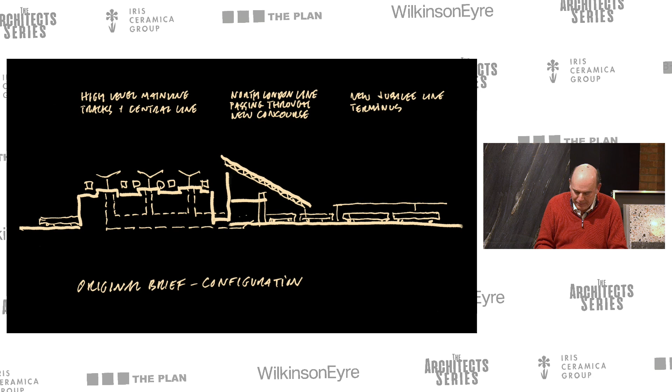This slide is interesting because this was the brief we were given: the high-level railways, and some sort of station with a roof leaning towards the railways, and don't worry about the town off to one side. We didn't spend long thinking that was a solution, and very quickly came up with the idea of turning it round to face south, so people could see this building and let the sun stream in. That idea generated this form, almost part of an elliptical shape with a simple roof and a very lightweight southern elevation with lots of glass.

The idea was to get the light to stream in. Somebody actually said to me they felt like they'd arrived at the seaside when they came off another train underneath the other railways and appeared in this space. So the sense of arrival was an important thing.

I think we'd definitely learnt something about the intricacies of curving geometries from the work on the depot. Here, this form was also generated by an idea about ventilation, that the air would come in at low level and the whole of the roof acts like a solar chimney, drawing air across itself so that you get a nice gentle breeze in the space.

And then the idea of contrasting the super lightness of this deep truss with the cables, and then an almost seamless roof behind, which acts almost like a giant luminaire. We're bouncing the lights off low level onto the roof and down onto the concourse below.

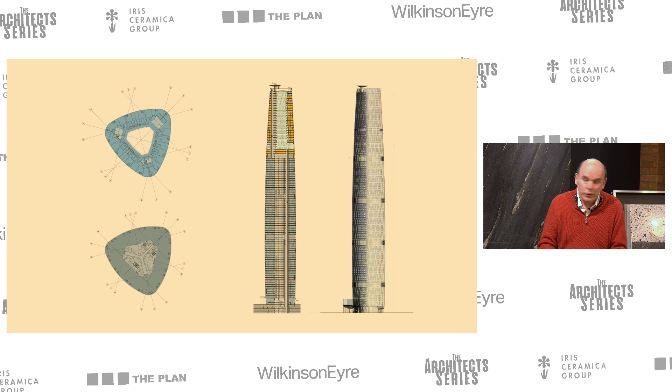And there it is. It's about two-thirds office, and then one-third on the top is the hotel, with the extraordinary space up the middle, the atrium space.

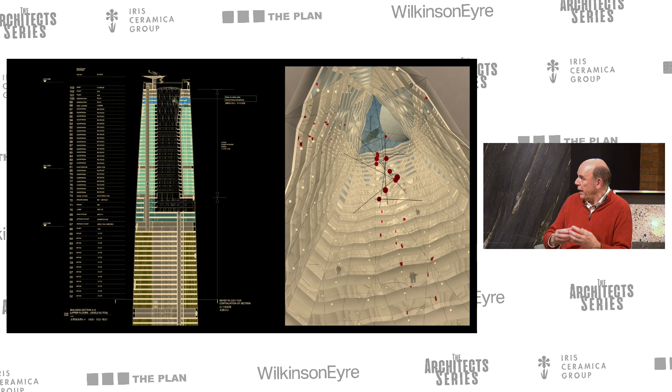Somehow we wanted to reflect the diagrid that was on the outside on the inside, and was struggling to think of a way of doing it. Then this idea came of expressing it as a series of diamond shapes and just pushing them out, so it got this sort of crinkling effect as you work round.

And it does create this extraordinary space. You can hardly see, actually you can just about see at the top, there's a little staircase that cantilevers out over the space - not for the faint-hearted, because it's an awfully long way down.

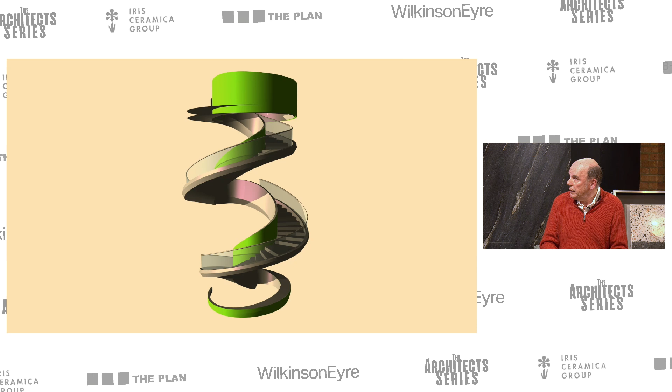Now, another project on this theme of geometry is the Wellcome Collection on Euston Road. The key thing on this project was the staircase. They had a problem that they couldn't get people to go up through the building to see the other exhibits, a library, and all the other things in there. So they were just concentrating on one floor, going to the cafe and the bookshop, and not really getting any further in.

We had this idea of a staircase which would link up these various spaces, along with some other alterations. It's made out of steel. Actually this is a slightly freer form - not purely geometric or rationalized geometry - and we're rather enjoying the artiness, in a sense, of a freer form as it works its way up.

It was an extremely complicated thing to build, but the Wellcome Trust was fully behind it, even though it took a little bit longer than we thought it would take.

And then we've done many, many bridges, but this is the most recent one in Copenhagen, called Lille Langebro. Copenhagen is a cycling city, as I'm sure you know. But it just happened that they had this new project, which you can see here on the screen on the left, called BLOX, an OMA arts centre. And they wanted to have something that connected Christianshavn with the main part of the city over the harbour, hence the competition for this bridge.

Now, we felt, looking at it, that in Copenhagen things tend to be slender, the architecture is restrained. So we weren't thinking about our more normal, muscular bridges, but something very delicate, just to create a line.

And it's very interesting when you look at the city plan, how this bridge sits on almost one end of a curve of a series of bastions with the moat and so on. So we wanted to, in a sense, recreate the memory of what is on the other side from the main city, which is Christianshavn - the side with the bastions and the moat.

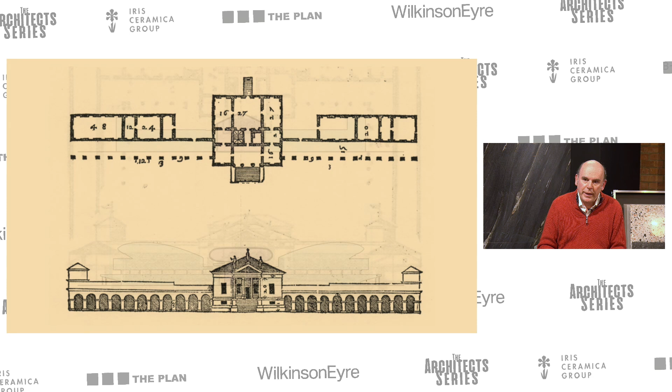And you have to have that relationship, in a sense, where it's kind of stretched out. And that's where we came from. And that was what, in a sense, we sold to the client.

And the key thing about this project is the members, who are a very powerful group, they own the ground, they run everything to do with the ground, are right opposite it. This is what they're looking at. So it had to be right.

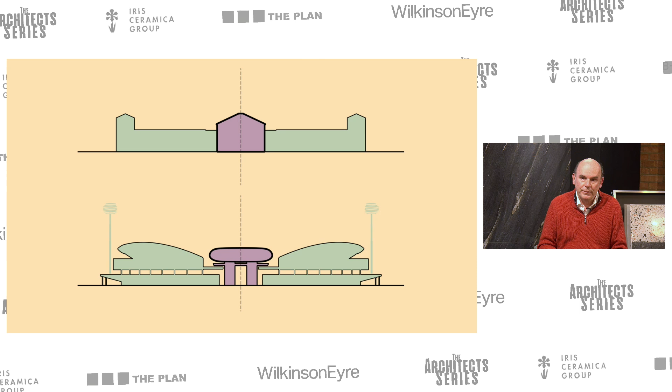So we came up with this thing where it's almost like two wings, but they had to be detached. You can imagine if somehow they connected to Jan Kaplický's form, it just would not work. And we also had to leave a little gap so you could still see the trees through in the gaps.

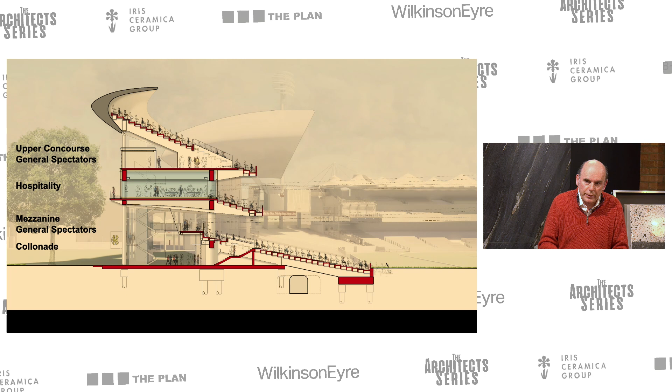This is the section. They wanted more accommodation, but importantly, in that middle level, they wanted restaurants and the sorts of facilities for the people, for the premium customer, let's call them that, who are paying more for watching the cricket.

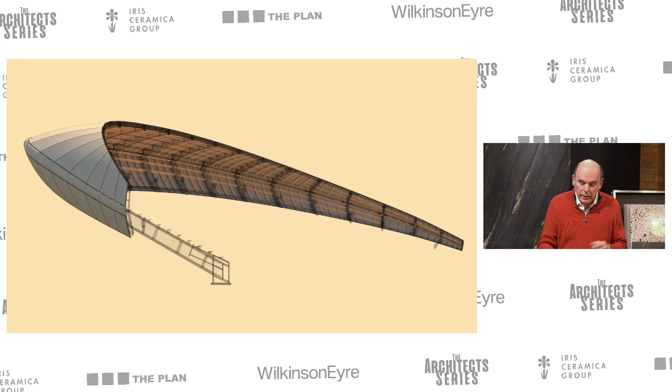And on top of it, and the reason I wanted to put it in here particularly, was the idea of this sort of curved canopy-like roof. How could we create a form that had a relationship with the media centre but was not made of the same materials? So this is fabric covered, stretched over steel and timber grid, in fact.

And it's kind of evolved from a toroidal form with some moderation, or some alterations to get the exact geometry. And what I rather like is the interplay when you look across these three spaces from one stand to the other with the media centre in the middle. The way the sort of curves seem to interact with each other is kind of rather pleasing.

And here, just the timber grid above the canopy. It just provides a bit of shelter and a bit of moderation of the environment. And actually, the view of the cricket is fantastic from everywhere, I can tell you that.

And this, I think, this might have been a police helicopter, I don't know, but it's looking down on the site. And for those of you who think cricket's boring, they've introduced a new form of cricket called the 100. And there's much more razzmatazz, and it's all over much quicker.

I'm not going to dwell on it, but, why isn't it going forward? Oh, there we go. And of course, now what's rather sad is that because of COVID, we haven't been able to go there. Chris has not been able to go there and see perhaps his finest work.

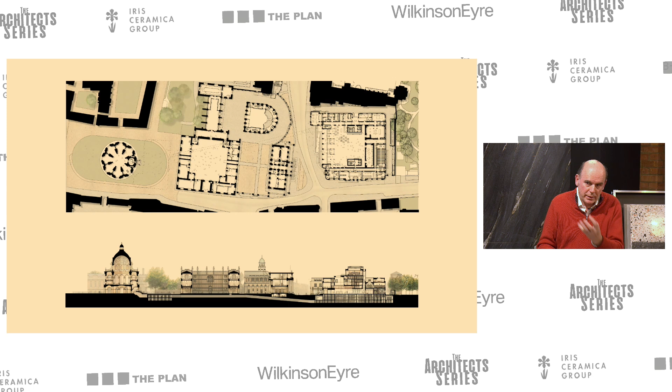This building on the top right is the New Bodleian. And when you look at how they link, it's really interesting, as somebody who likes to rationalize things, that all these things don't quite line up. It's almost like there's a dynamic tension there. You think they're centered up, and there are vistas, but they don't quite line up.

On the right here, you're looking through the Clarendon building to the door to the New Bodleian, which was only used once, when the building was opened by the king at the time, and never used again. It is very odd. This is a 1930s picture of it recently completed. It's almost as if they didn't want you to go in there. This was a bit, just keep out. There's things going on in here. You don't need to know about it.

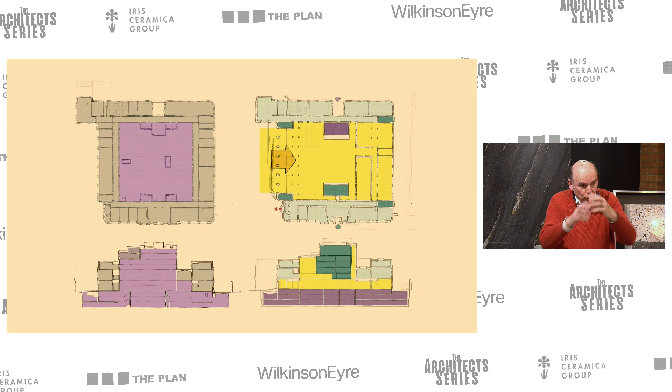So the plan on the left is the basic diagram of the building. The donut building, the middle of the building was stacked full of books, about 11 or 12 stories of book stacks, all open to each other with this enormous fire risk. And on the right, our basic diagram, which was to open the facade on Broad Street and to get the public in and make it accessible to people.

So this is what it was like before. And then basically we opened it up, created steps, created a frontage, in a sense, made it rejoin Broad Street. It's south-facing even, so people can sit out on the steps. And then created this arcade, and you go into an extraordinary space where there's a kind of raised cloister of books. These are all the open access collections. All the rest of the books are special collections. These are the super valuable books, and the reading rooms are upstairs.

So the public come into this space. There's a cafe. There's extraordinary exhibitions which they have from the collections. So it's really opened it up and made it far more accessible. And then up on the top there's a reading room which actually has, if you step outside it, one of the best views in Oxford, which very few people get to see, looking across the roofs toward the Radcliffe Camera.

And this building was designed by Giles Gilbert Scott, who we come to again. And you just note his trademark, which is these ranks of strip windows like soldiers lined up. And we see that again at Battersea Power Station, where we were asked this. It had already been master planned by Rafael Viñoly, and we kind of picked up part of his master plan, which is the power station itself, and pretty substantially redesigned it, and have been working on it with a big team led by Sebastien Ricard pretty much ever since, over the last 7 or 8 years.

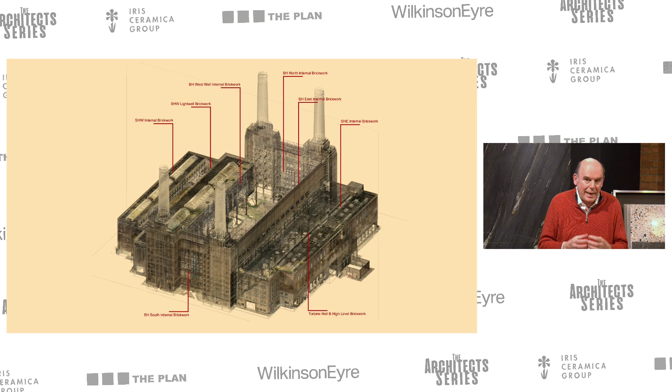One of the exciting things about technology, which we used on this and other projects, is point cloud surveys, which I'm sure people are familiar with, where you get this extraordinary almost X-ray-like detail in colour of a building, which we found extraordinarily useful.

This is the plan of the building, and it divides up into a series of switch houses on either side, a boiler house in the middle, and two turbine halls.

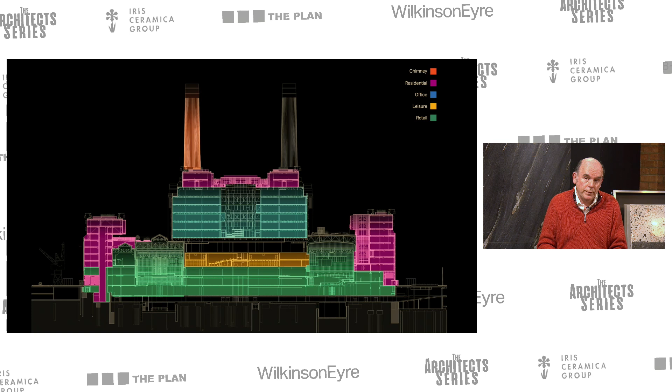Just to explain how it's used: at lower level will all be retail, and then the pink is residential, a sliver of leisure in the middle, and that blue is offices, which are taken by Apple - they've taken all of the offices - and then up on the top, residential.

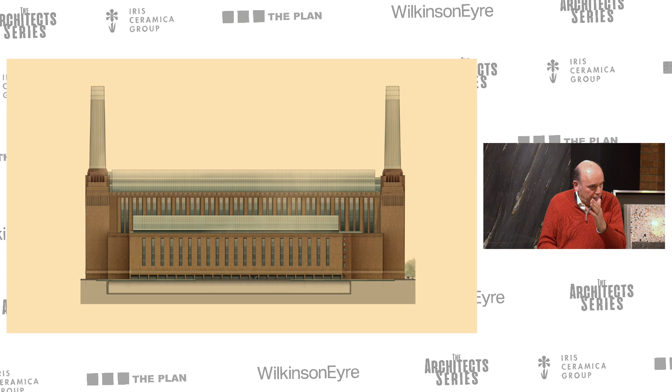Just a view of how basic the elevation was - there were windows in it, but not many - and how we reorganized it and brought back the Giles Gilbert Scott elements of the windows, because we needed light in the offices, but also in the residential areas. So just a detail of that.

At the southern end, there's a rather extraordinary thing, using the sort of high-tech technology of cable trusses to restrain a brick wall all the way up that facade, which I think creates an extraordinary and high space. So various elements of it are actually beginning to appear.

And then the other turbine hall, which was built later, is also coming on. And then there's a lobby area, but above this lobby area, I think it's about 50-odd meters high, is the...

And then at lower level, in the switch houses, there's various public spaces and routes to get to all the apartments. And then up on the top, the residences, where you're up next to the chimneys, where we created a series of villas, essentially, and gardens that work with the villas.